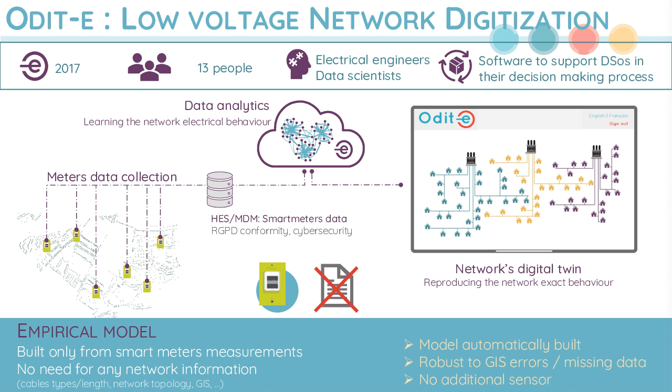So with this digital twin, we have several services that help DSOs for planification and control. The first service we offer is topology: retrieving the tree of the network, and then giving the right association between the meters and the transformer. But we go further and find the right association between the meters and the feeders and the phase in the low voltage network. This is the first use case, called topology.

The second one is network analysis. So we analyze the secondary substation and the voltage plan, meaning we can say how much the transformer is loaded, and also if the substation is balanced or unbalanced. We can also check the voltage plan to see if the quality of supply is good.

The third use case is impact prediction. First we create a map of the real capacity of the network to host any new loads, for example new production or new consumption means, like solar panels or charging for electrical vehicles. So first we build this capacity map of the real network as it is, and after, we can run simulations to see the impact of adding these new loads on the low voltage network.

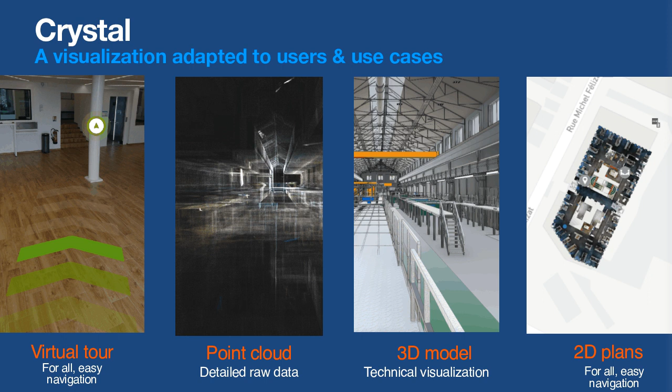So as I said, for people that are not 3D experts, the virtual tour - like moving inside 3D pictures - is going to be a much easier way for them to use the digital twin data and collaborate inside that data.

So it has all the standards for a modern application.

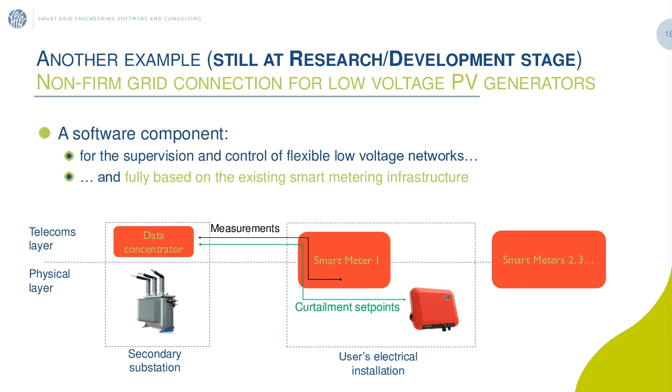As I said, it's still at research and development stage, but it's quite advanced. We have a physical setup here in the lab with real smart meters that demonstrate this, and we're moving step by step toward a commercial offer with this project. So that's it, I'm done with my presentation, and if you have any questions, I'd be happy to answer them. Thank you.

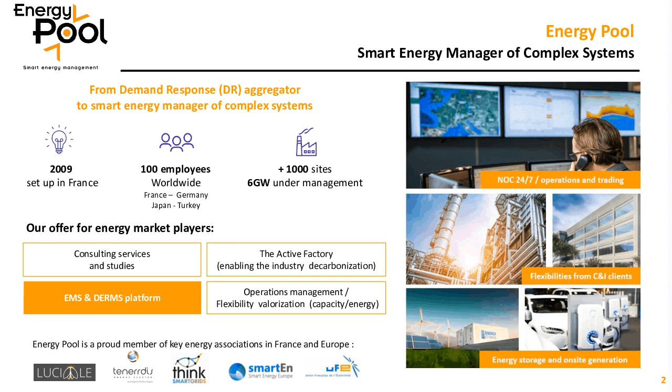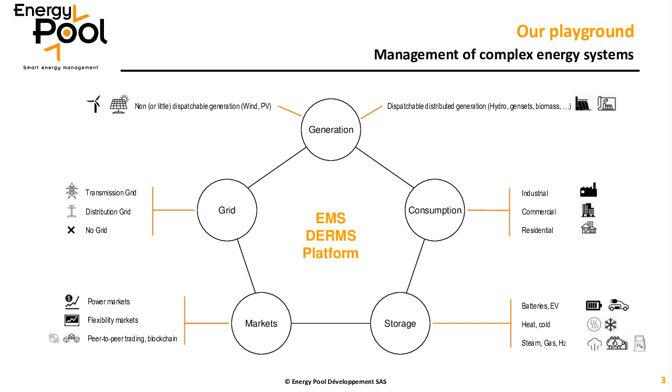So on the control proposed by Energy Pool, we have a two-level control. The first one is the one that I already presented, the EMS platform that is stored in the cloud.

So how does it work? We have 3 different modules. The first module is called the forecast module. Through a connection to weather forecast, we are able to do a long-term forecast, 24 or 48 hour. Through machine learning methodologies, we can forecast the load consumption and the electricity prices.

The second module is the customizable one. We can customize the microgrid topology, the equipment characteristics, the size of renewable, the size of a circuit breaker, whether we allow export on the main grid, the size of the batteries, the ramping of some asset, and so on. We can also customize the operation guideline, meaning what is required by the owner or operator of the microgrid.

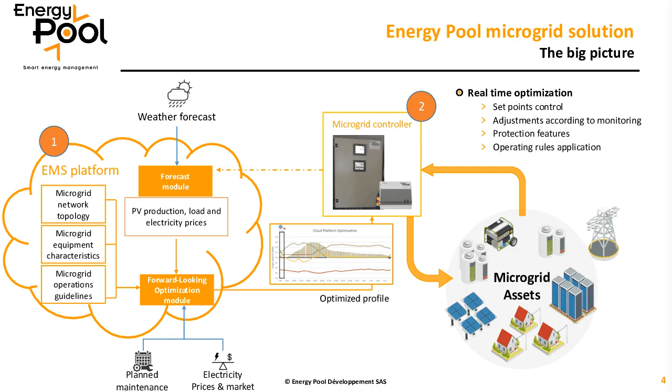And that's all for this presentation. Please do not hesitate, if you have any question you can ask it through the chat, or here are my contact details. Thank you.

I do not see any question yet. Feel free to ask your question in the chat now if needed. Otherwise, I will thank you for this presentation, which highlighted a different offer from Energy Pool than the one we are used to seeing. It's nice to see that you're enlarging your offer. And I will give the floor to the next presentation. Thank you.

So our next speaker is Gauthier Chicot from DiamFab, the diamond technology company. Gauthier, can you hear us? Can you turn on your microphone and your camera, please? Can you hear me? Yes, very well. Thank you, the floor is yours. Yeah, thank you, I will try if I can change the size.

Perfect, thank you. So I will introduce you to DiamFab. We fabricate diamond as the next generation of semiconductors. But first of all, I would like to introduce our team and support. DiamFab has been founded 2 years ago and is a spin-off of Institut Néel CNRS. I'm Gauthier Chicot, CEO of the company, which I co-founded with Khaled Driche, the CTO of DiamFab.

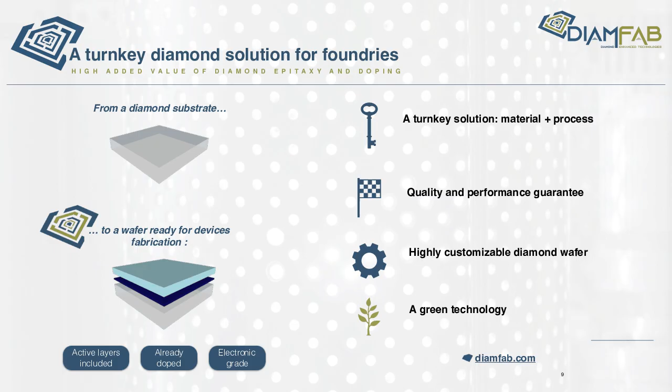Just to finish, we are already selling our product to R&D actors thanks to our network, and we are now targeting to sell our product to industrial players thanks to our expert position. Today, our customers are mainly in USA and Europe.

Europe especially is a favorable environment for faster development because of new policies for sovereignty issues in the semiconductor industry, and also the strong interest for smart grid and new electrical grid. We are convinced that our technology is very promising for smart grid, and we are looking for opportunities of collaboration to accelerate the development of the diamond sector, diamond semiconductors in power electronics, in the new electrical grid.

Just to conclude, to go further with diamond, let's go together. Feel free to visit our website to learn more about our technology, send me an email, or just ask your question in the chat. Thank you.

Thank you, Gauthier, for this very interesting presentation. I do not see any question yet in the chat, so I must have been very clear.

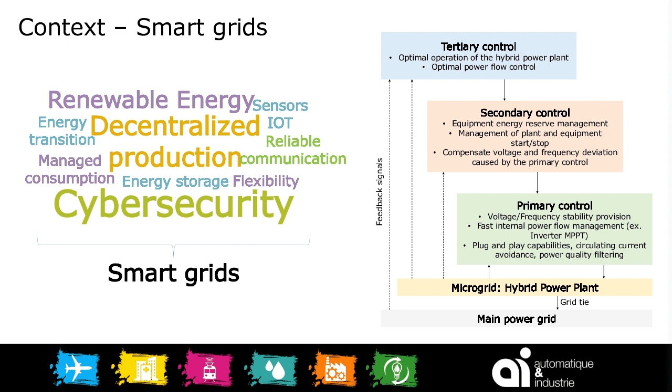In the context of smart grids, and more specifically microgrids, our solution scope lies within the tertiary and secondary control levels shown here on the right. For our EMS solution, we have several entities that interact at these two control levels, tertiary and secondary. On the upper level, data analytics is used to propose an optimal operation of the hybrid power plant.

In this kind of solution, the virtual twin of the system helps us implement robust optimization strategies to attenuate system uncertainties, such as the weather and power consumption. To implement these solutions, we strongly rely on our extensive field experience in automation and real-life system control.

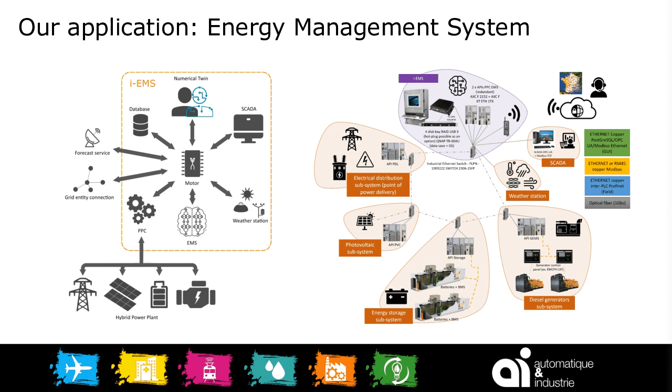So we propose with this solution a high level of availability, using reliable communication architecture, redundant loops, and efficient PLC programming. An example of a real architecture solution is shown on the right.

Finally, an important step for us in the early stage of development of this kind of product is to validate our solution in an environment as close as possible to the real system. This allows us to advance on the TRL scale of our product development.

A method for this is what we call HIL, the hardware-in-the-loop testbed platform. This is a validation approach using real-time simulations of the hybrid power plant, thus validating the behavior of the real physical components used in our solutions, such as the PLC power plant controller, or PPC, and even validating the energy optimizations proposed by our machine learning algorithms and robust optimizations.

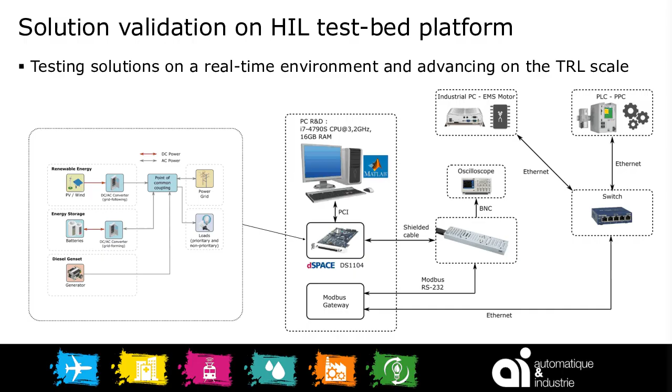That's the end of the presentation. If you have any questions, I will be pleased to answer.

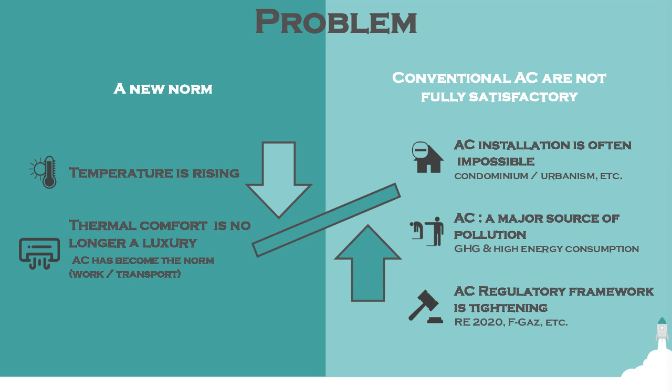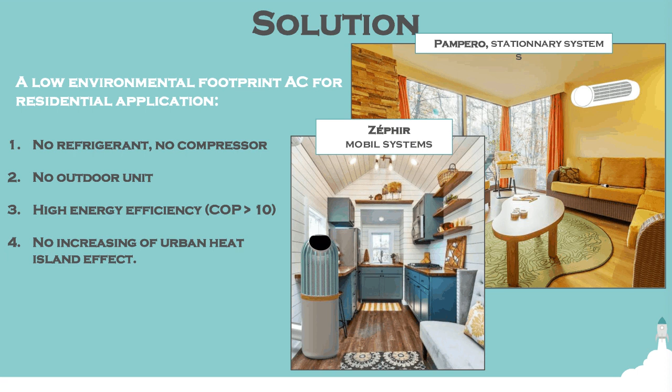Our value proposition is simple. We are developing an innovative, low-carbon residential air conditioner, 3 times less energy consuming than a classic AC, which does not need any refrigerant to operate and does not increase the urban heat island effect. Based on the same technological developments, we are launching 2 product ranges: the Zephir range, a mobile AC with cooling capacity between 1.5 to 3 kilowatts, which will allow overcoming temporary thermal discomfort in a dwelling; and the Pampero range, a wall-mounted AC, more powerful, with cooling capacity between 2 and 5 kilowatts.

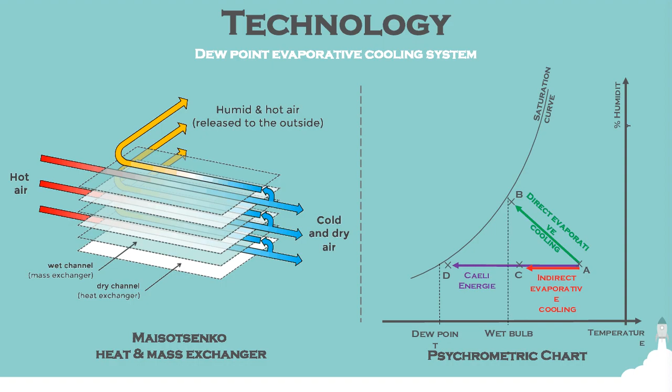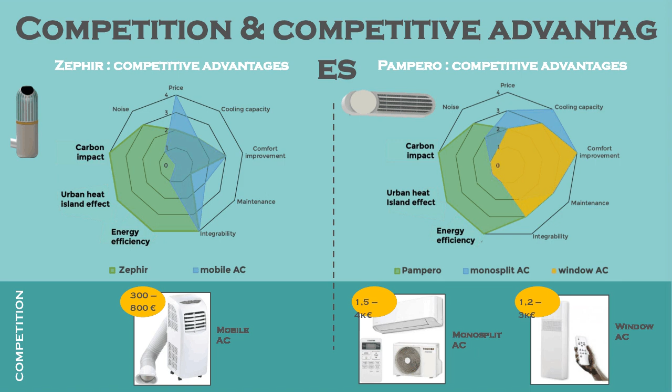Just to give you a brief overview of our team, it's quite good. We are located in Meylan, near Grenoble, and I think a big part of our development now is due to our capacity to have a nice ecosystem around us.

We are dealing with R&D research labs, with industry specialized in prototyping, and talking about market contracts with other industry players. We are also incubating in CSTB in France, the Center for Scientific and Technical Study in Buildings, specialized in the redaction of norms and certification.

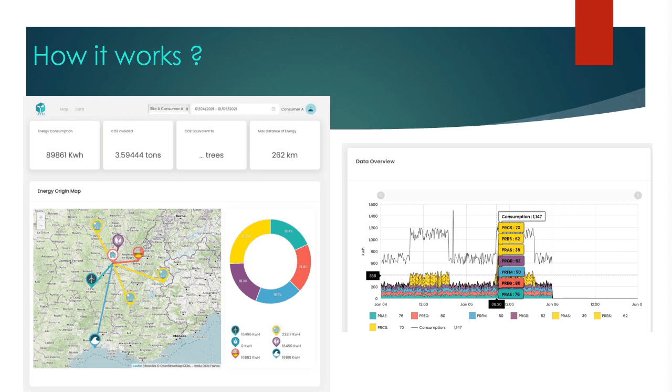Here is the world system with guaranteed origin of energy, and many people buy their energy with this guarantee of origin system. But now our system reconciles the energetic workflow with the contractualization workflow inscribed in the register. It's a big way to achieve reconciliation and to improve renewable energy consumption in each country that we want to reach now.

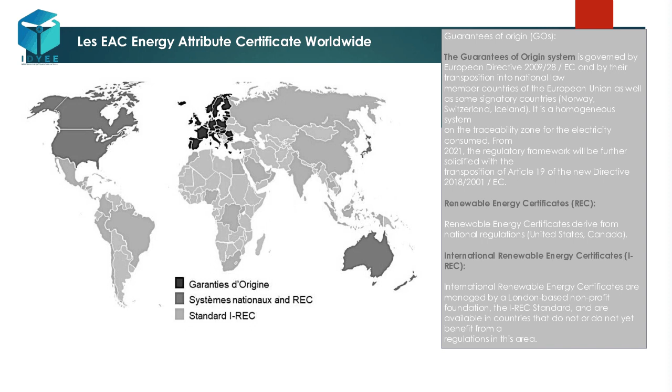There are more advantages to this solution and benefits for corporate and producer. It's a meaningful way to be truly sustainable for tomorrow. It's okay for me.

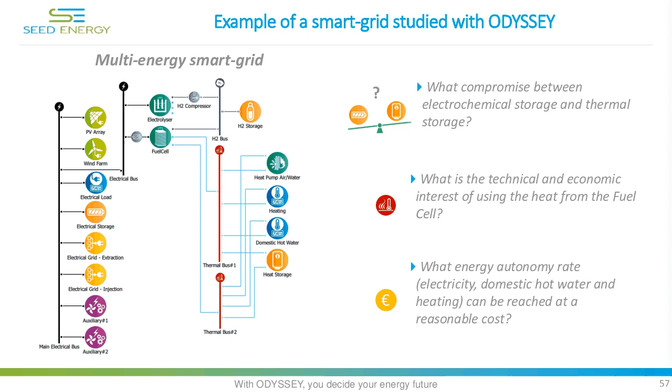What compromise between electrochemical storage and thermal storage? And I could add, how to valorize the capability of hydrogen to store energy over the long term. What is the technical and economic interest of using the heat from the fuel cell and, of course, also from the electrolyzer? And, of course, the main point is what energy autonomy rate can be reached at a reasonable cost.

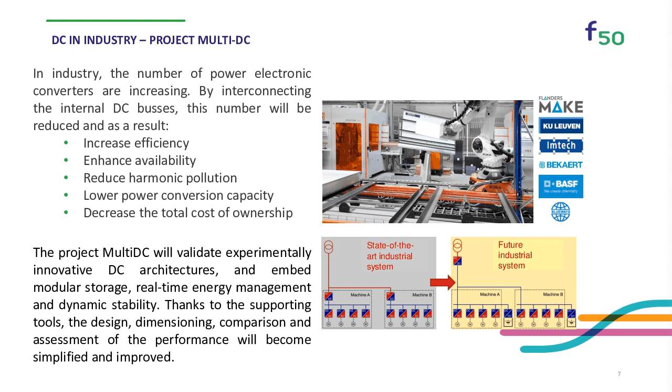We are testing out different DC architectures, also different DC voltage levels, because there is still no standard on the DC voltage level. We are all used to 230 volts when it comes to AC and 50 hertz, unless you go to other places in the world. When it comes to DC, the main architecture and voltage levels are not yet fixed, so we are testing out what an optimal level would be, also when it comes to integrating storage modules, batteries, supercaps, and other things into the system.

In the end, the KPIs they are working on are to reduce the total factory's electricity-related system losses, the conversion losses, by around 5%. There is still the need to do some conversion of electricity because not all systems, as there is no standard yet on a DC bus, are running at the same DC level. So we are experimenting with multi-port DC-DC inverters and those kinds of things. The total harmonic current distortion at the common point of coupling, mainly the grid connection, needs to be 50% lower, removing the need for other systems trying to rebalance that current distortion.

So there are fines, at least in Belgium, on the company when you have a current distortion which is too large. So you also always do a compensation, and when we are able to diminish the height of that compensation, it also saves capex. The voltage unbalance factor at that common coupling point needs to be decreased, and it leads to at least meeting the capex of a reference AC alternating current grid. But in fact, we would like to see a diminishing of the cost by around 10% compared to a traditional AC grid. What makes it a little bit difficult on the investment cost is that most of the inverters I'm talking about are not yet common practice, so due to economies of scale, the typical equipment is at present still more expensive compared to the AC alternative.

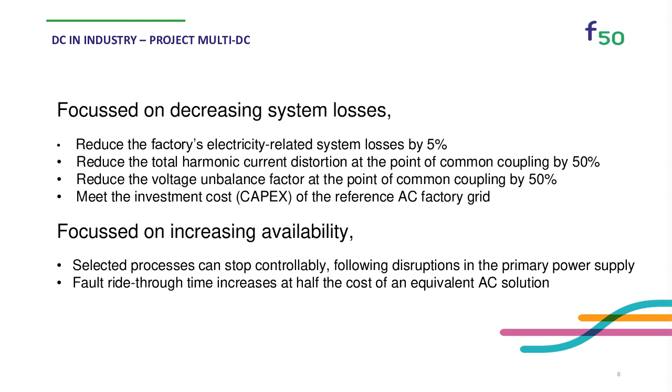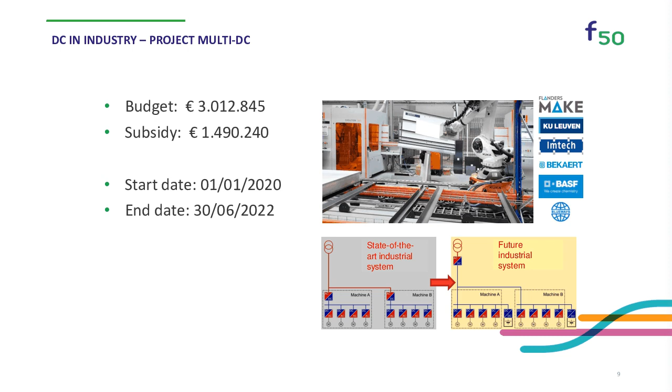In total, there has been a budget foreseen of around 3 million euros and a subsidy of around 1.5 million euros. So you can see that on average what we are able to have as a subsidy rate is between 50 and 70%. The project is actually still running, so I'm not able to show you any results yet. We hope we might be able to do so within half a year, some intermediate results. It started the 1st of January last year, and it will run until mid next year. And with all the Corona stuff, we also see that in such a project there are some delays that we need to take into account.

This was a focus on one project. We grouped all projects, or part of the projects, into a brochure that we also have available in English. It's called Flanders SmartEnergy Region. If you would be interested, I have no problem sending it through. I would really look forward to having a good link with all of you. If you see possibilities in cooperation with Flemish companies, or possibilities in coming to the Flemish region, don't hesitate to call us. We are there to help you, and I was able to show you one of the multiple projects that we have in the area of smart grids.

So thank you. Thank you, Frédéric.

Thank you very much. Yes, we hope to be able to meet maybe on an Enlit trade show later this year, if we all manage to organize it. Let's keep fingers crossed. Exactly. And now I don't see any question for you, so I guess I will give the floor to the next speaker, who is Cédric Brûle.

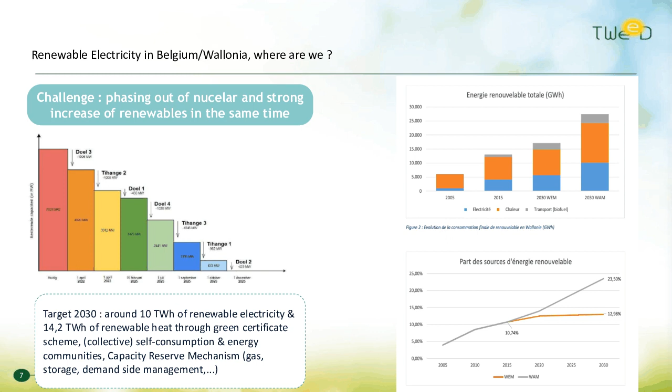Very quickly, the smart grids value chain in Wallonia. We have done an analysis for the smart grids value chain in our cluster three or four years ago, and we discovered that 73 players in Wallonia have at least one technology that can be very useful for the value chain in smart grids.

At the same time, we have done a SWOT analysis and job provision and job description work, because we see that as we evolve in the decentralization of the sector, we need more and more specific job descriptions, and our companies have difficulties finding the right people to do the job.

It was very interesting to see that more and more data analytics people are needed, and it's quite difficult to find them. So the objective of the value chain analysis was to discover where we can provide training and help companies find the right people.

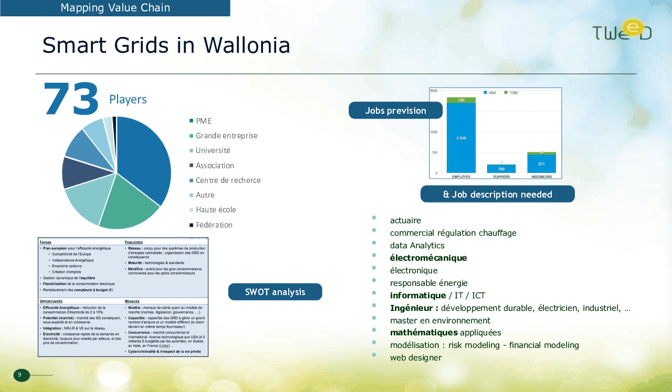So what we have done is to split the value chain in smart grids into different topics, from R&D to conception, studies, transport, installation, the hardware, and until the recycling of the system. You need a great number of companies and know-how, universities, R&D centers that can provide knowledge in it.

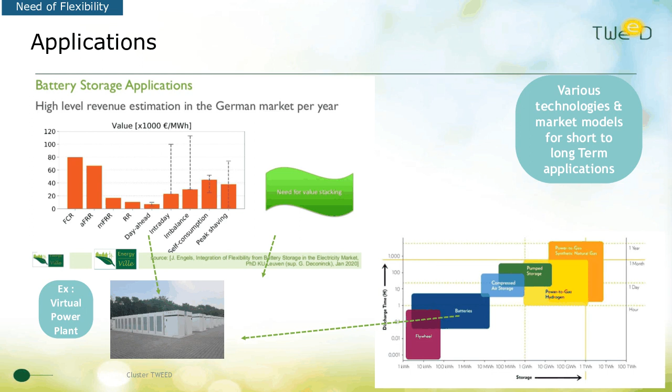So we see really this type of project coming up. For sure, storage is an important topic for smart grids. I have two or three examples of storage applications within these flexibility services in the cluster.

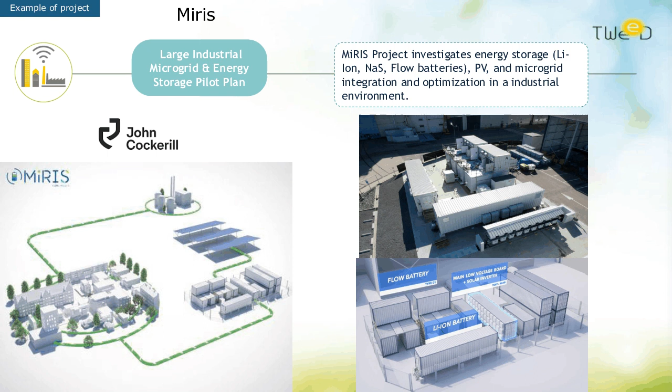The first one is a large industrial microgrid with an energy storage pilot plant. The idea here is to test different types of batteries - flow batteries, lithium-ion battery - within a microgrid, so you can optimize it. And for sure, I've heard today about some great companies from Tenerrdis and Minalogic that can help with this type of project. We see that this type of optimization is very, very important for the market.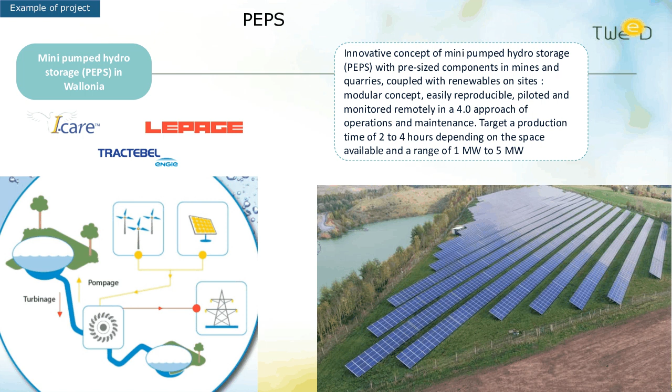Another project is pumped hydro storage. The target here is very big industries that have more space to put some solar panels, and that have some field where you can easily put a small pumped hydro storage. When I say small, it's from 1 to 5 megawatts. With this size of storage, we can offer some flexibility to one or two or a few industries in terms of self-consumption, but also for balancing the system in general.

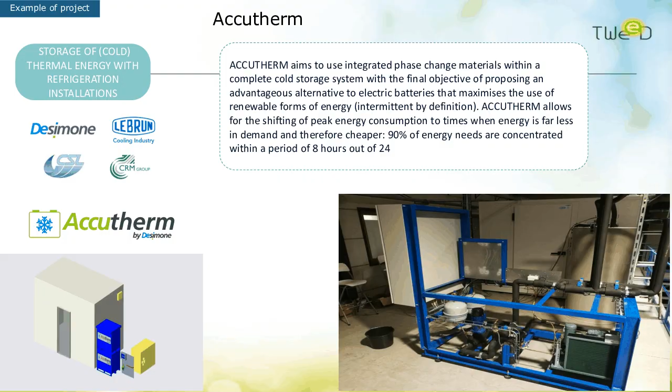So I think that was my last slide. I would be very happy to discuss with some companies if needed, for sure.